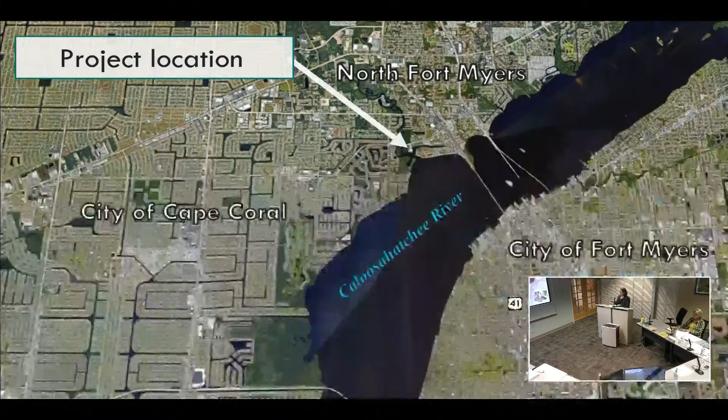This subject property is located north of the Caloosahatchee River in North Fort Myers. It is located immediately south of Hancock Bridge Parkway and west of North Cleveland Ave. It is currently zoned CPD and is permitted a marina with up to 352 dry boat storage slips, 24 wet slips, 5,864 square feet of office uses, and a max height of 50 feet.

The property is in an urbanized portion of the county, as noted on the surrounding land uses map. There are a number of multifamily residences in proximity to this site, with an estimated total of 750 condo units along the corridor on Hancock Bridge Parkway. There's also an assisted living facility and a number of commercial uses, including the Nauti Parrot restaurant.

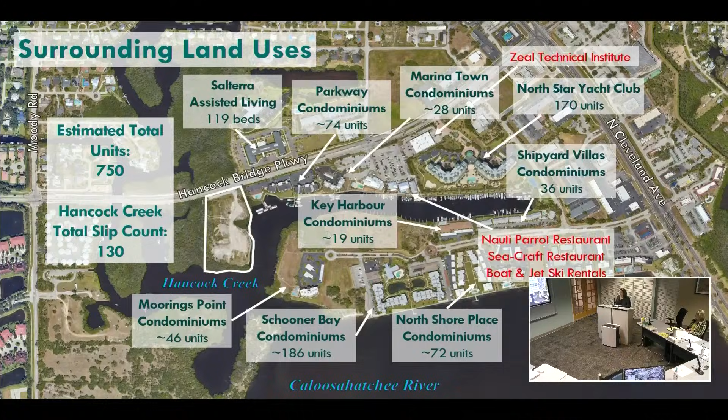Seacraft restaurant, and there are also boat and jet ski rentals. There are a number of boat slips along Hancock Creek as well, with a total slip count of approximately 130 wet slips. The CPD amendment being requested would allow for a reduction in the dry slips from 352 to 160 dry slips, and an increase in the wet slips from 24 to 50 wet slips.

We're also requesting clarification of the approved uses, which would consist of 4,500 square feet of boat sales/office, 1,500 square feet of restaurant uses, 800 square feet of retail, and 980 square feet of a food truck area with no more than 3 trucks proposed. The maximum building height being proposed is 135 feet.

The property is located along what we consider a water-dependent area. It is noted on Lee Plan Map 1H as number 29. This outlines water-dependent uses and shows us where water-dependent uses would be appropriate. In this case, a marina would be an appropriate use for anything in the water-dependent overlay.

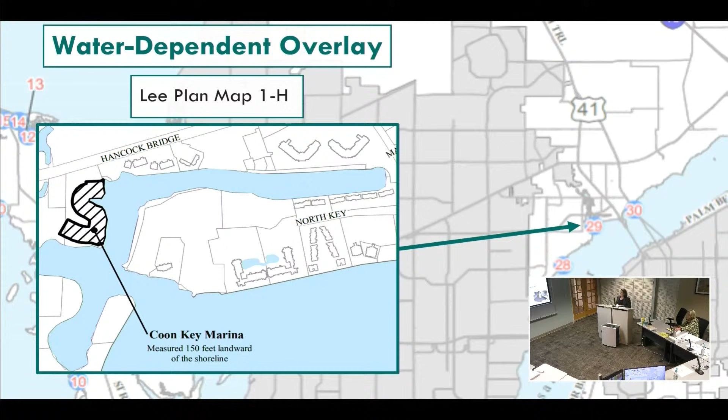So there's no bus route on Hancock? There is no bus route on Hancock Bridge Parkway. Okay, thank you. Can I clarify something? Sure, Brian Smith for the record. There is an express route on Hancock during the trolley. About 220 feet to the east of our site is an existing trolley sign on our side of the road, as well as on the opposite side by Salterra, the assisted living facility. So it's part of that express route during trolley season. During what season? The downtown Fort Myers trolley season. So it's running right now? It should be, yes. And where does it run, between what and what? It basically runs that same route, but on Hancock Bridge Parkway. Okay, thank you. Yes, ma'am.

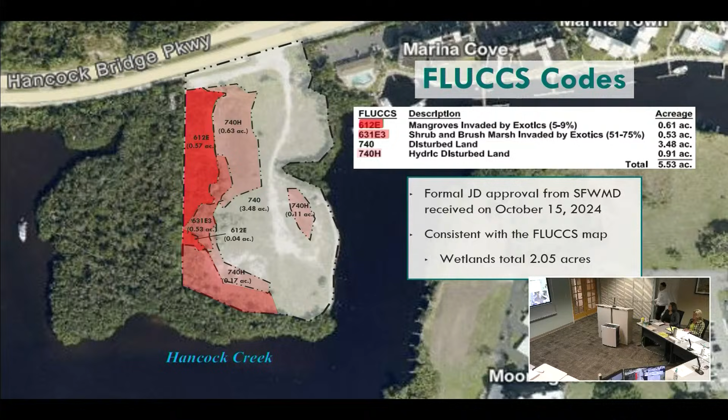Good afternoon, for the record, Yury Bykau with TR Transportation Consultants. I have been sworn in and previously accepted as an expert in transportation planning, and would like to be accepted as one today as well. Yes, please proceed. Thank you.

What do you attribute the reduction in trip generation to? This is mainly due to a significant reduction in the number of dry slips specifically, about 192 dry slips, so that's where it comes from. So the project as proposed is overall a reduction in intensity over the existing approvals? Yes, correct. Thank you.

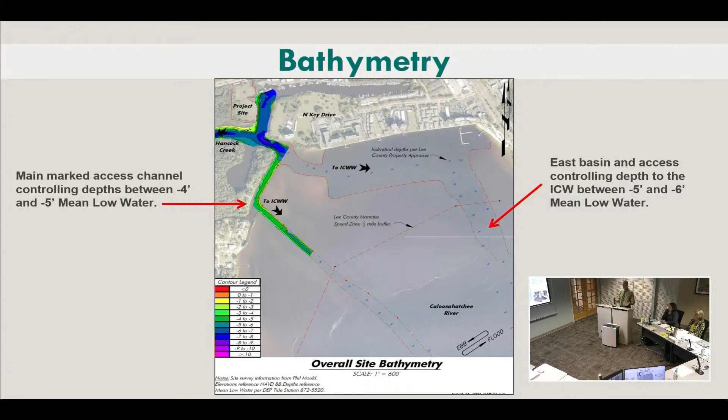North Fort Myers is underserved in terms of boating access. The most recent marina facility in closest proximity was the Prosperity Point Marina on the north side of the river. As you go over the Edison Bridge headed north, you can see what happened to it with Hurricane Ian - it's a mess. That was really the only serious commercial marina other than Paradise Isle Marina, further down the shoreline in Cape Coral. There's just not that much boating access for commercial or public use of the waterway.

This is a close-up of the location. Again, we are buffered by a conservation area here, so there's no residences in this location or in this location that would be affected by a dry storage operation.

We are on Deepwater Canal access. The Hancock Creek flows down through here and through this area and out, so it's got good water quality, good tidal exchange. Those are some of the things we have to meet with the state in terms of water quality. Again, it's a reduction in the total number of slips from 352 to 160 dry.

We're increasing our wet slip storage. Part of this is staging for the dry storage operation. Keep in mind that of the 160 slips in dry storage, on the best day of the year, say 4th of July, we may launch maybe 16 slips out of dry storage. But those slips need space to tie up as staging to go in and out of the dry storage. So while we've got 50 wet slips proposed, a certain amount of those would be dedicated for staging for the dry storage operation. So it's not 50 wet slips dedicated in the water - that's important in terms of the total slip count for the site.

I've already talked about the other items in here. Again, take a look at these destinations with the Nauti Parrot Tiki Hut restaurant, all the different activities that take place up this canal, including personal watercraft rentals. This is really in the center of quite a boating community, and it's a super appropriate use for this location - servicing not just the vessels that exist in this area, but providing access for upland residents that don't live on the water but want to partake of our waterway resources in the county.

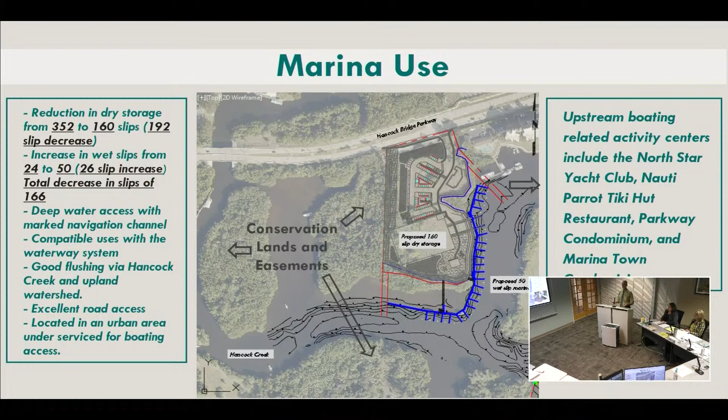This is where we stand with the Manatee Protection Plan. It's an area of special concern in the river. Our shoreline is based on the amount of linear footage of shoreline that we have, and that allows us to have the 50 slip maximum.

In order for us to facilitate the 160 dry storage slips, we're going to have to find a donor property and transfer slip credits from those donor properties. We have a number of donor properties available. One of them we're in a contract with, but that's been put off to the side as they resolve some ownership issues. So we do have sources for transferring slip credits.

I don't know if you're familiar with that system - I'm happy to advise you on what that is if you're interested. I am familiar with that. I worked with that when I was at the county attorney's office.

So you need 160 slips from another location, for the dry boat storage specifically. In the interim, if they do not secure the upland site, if there's no way for them to transfer boats from the land into the water via travel lift or gantry assist or anything like that, they could still operate and have like a boat dealership operation on that site where they could have boats. If they just can't launch them into the water, then they really would not count as a boat source. Again, the whole premise behind the Manatee Protection Plan is where the boats are originating from and what threat they pose to manatees in the river.

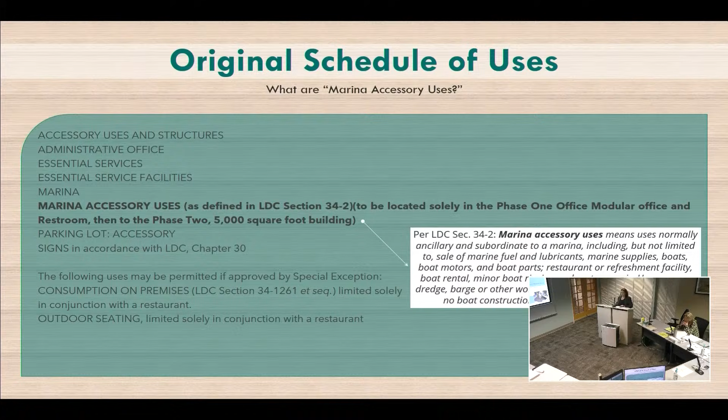Before you start, I read the 48-hour notices, and my understanding is the 48-hour notice from staff represents codification of all the changes proposed in the applicant's 48-hour letter. Is that correct? Yes. So I can work off that document in preparing the recommendation? Absolutely. Okay, all the uses that need to be in are in, all the uses that are not are out. Correct. Okay, thank you, Cindy.

I just wanted to outline briefly the original schedule of uses for this site. It references something very interesting, which is marina accessory uses as defined by LDC section 34-2, which is the definition section of our zoning chapter of the LDC.

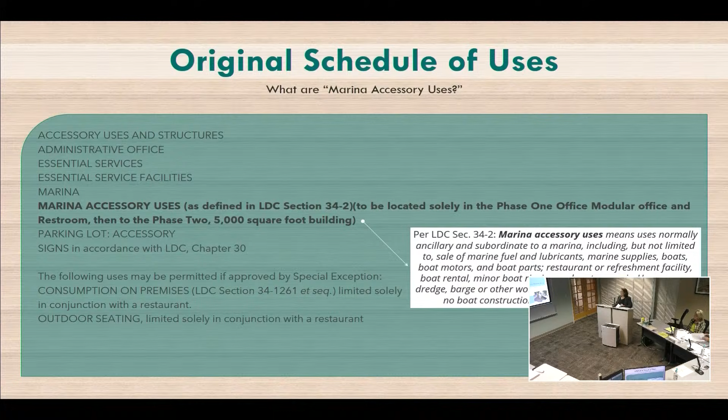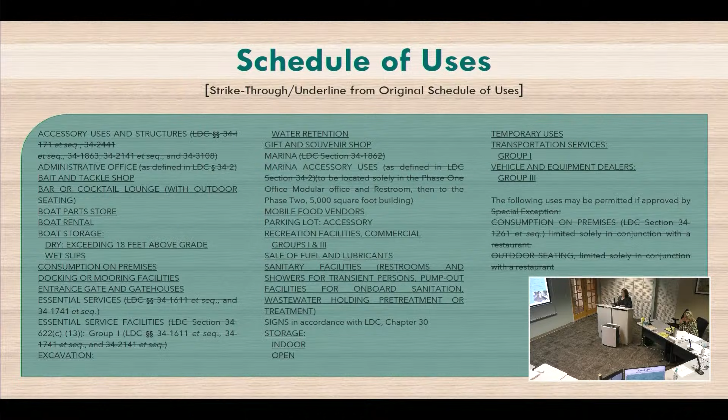The reason we are modifying the schedule of uses to look like this is we've actually broken down what those uses are, the marina accessory uses. The problem with initially tying an LDC section and generalizing marina accessory uses is that at some point in time, that section of the LDC can be amended without notification to any property owners, because there's no way of tracking how many zoning resolutions have marina accessory uses listed. So by breaking them out this way, which is traditionally what's done in more recent cases, we're able to clearly state what we're proposing. So it still includes marina accessory uses, but the specific accessory uses that you hope to operate on the site have been broken out and added separately. Yes. Thank you.

That was all I wanted to add on that section. I'm gonna ask that Brian come back up and discuss the master concept plan.

Good afternoon again, Brian Smith for the record.

So you're going to see some consistency between both our master concept plan and their master concept plan when we went through this process. With our master concept plan, as Hans eloquently stated, we are in a Mecca boating community. This is where we are, this is where we live, and a lot of people move here for that reason.

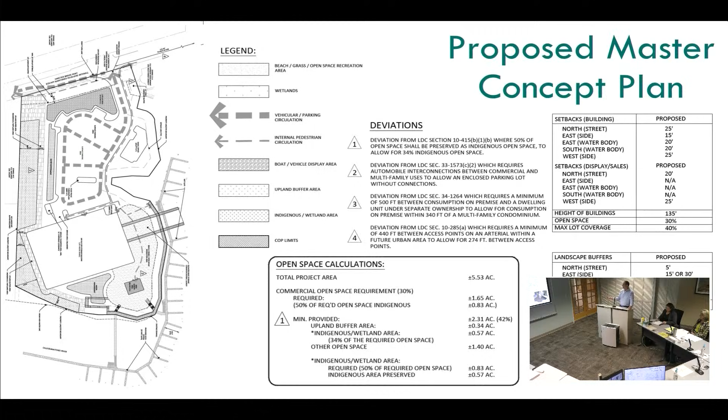We went through the master concept plan on the last sheet. This one color-codes it a bit for ease of reading. Again, as we stated, the sales office is located on the eastern side of the property, consistent with the previously approved master concept plan. The parking facilities are north of our dry slip building, again consistent with the existing commercial plan and master concept plan.

We're also showing the location of the beach grass open space area that is open to the public, as well as a restaurant canopy bar area available for patrons coming by vehicle or by boat. We have our stormwater management areas as well as our preservation areas around the site, also color-coded. The light green is indigenous wetland area that we are preserving - an area of high quality, good mangroves that the previous CPD did not preserve along that western side. We are preserving quite a large amount.

Again, to quickly go over it, the east landscape buffer is 25 feet, right adjacent to the Parkway condominiums - 5 trees and 30 shrubs per 100 linear feet. The shrubs are supposed to grow to mature height, not trimmed up, and it's an 8-foot wall. It's a type E buffer, yes ma'am, with an 8-foot wall.

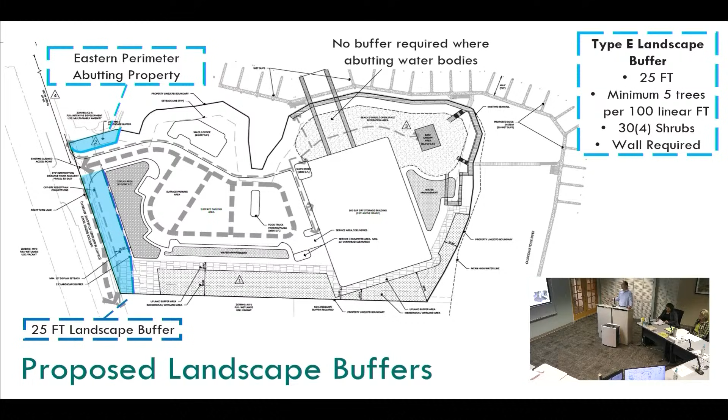Again, anytime you have vehicle sales display, it triggers another code in chapter 34 that requires a setback for that display area as well as a 25-foot landscape buffer. It's not considered a type D or E buffer, but it has its own specific rules and requirements - a 2-foot undulating berm, 5 trees, and a double hedgerow like you'd typically find for a type D buffer. But the trees are also upsized - instead of a typical 10-foot tall tree, they're required to be planted at 14 feet in height, giving more of a screening effect for the boat display area.

Deviation 1 was to allow a reduction in indigenous requirements, because in the LDC, when you have open space requirements - say a 30% open space requirement - 50% of that has to be indigenous if indigenous vegetation occurs on the project site. To make this a viable project, we preserved an area along the western side, but we weren't able to meet the 50% indigenous open space requirement, when the previous CPD preserved nothing and only had 10% open space. We have over 30%, and I believe our master concept plan shows we're preserving 42% open space on the property. So deviation 1 would allow us to reduce the 50% indigenous open space requirement down to 34%, but we are above and beyond our required open space in general on the site.

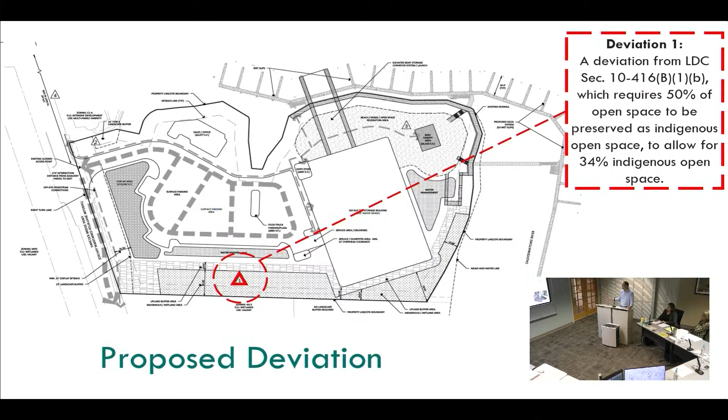Again, went through this deviation from that section requiring 50% open space to be preserved. Out of the project, as you can see on an aerial, the majority has been disturbed. When you visit the site, it has been disturbed - it was used as post-Ian boat storage and has just been disturbed over time, even since this first CPD was started, because they actually pursued a development order at one point, and I believe that was all withdrawn a long time ago.

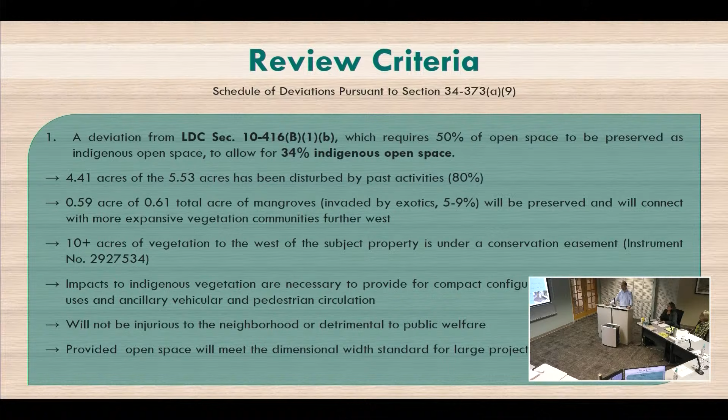Deviation number 2 is vehicle interconnect. We're asking for a deviation from section 33-1573 C2, which requires that when you go through a rezone, you provide parcel interconnects within Lee County. Instead of having a parcel interconnect, we cannot go to the west because it's all conservation area, so their only opportunity would be going to the east.

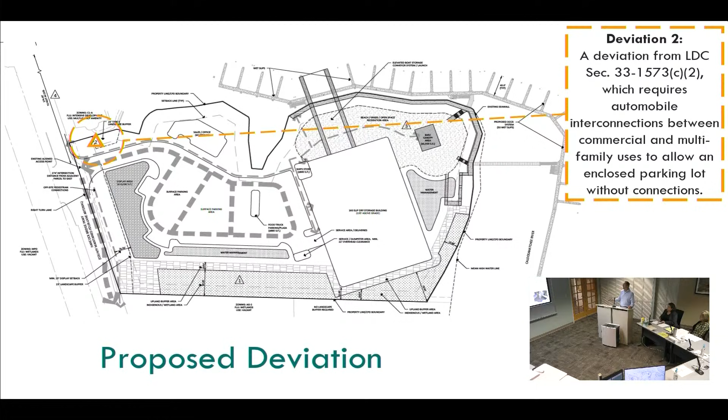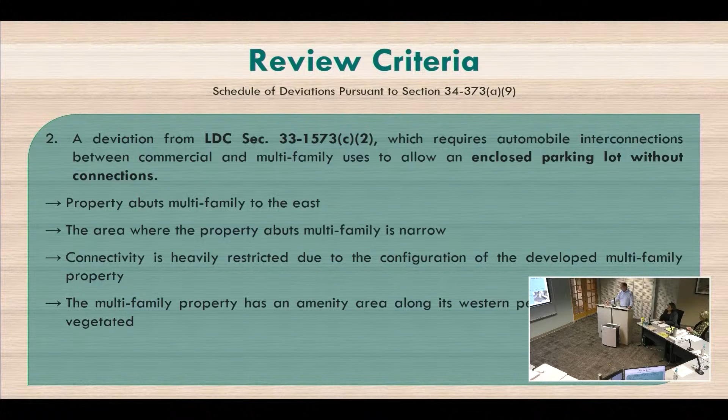That's an existing condominium project called the Parkway Condominiums. Their parking lot ends there, and they have sidewalks. We did not feel it was appropriate for commercial uses to access through their parking lot into Hancock, as we already have a full median cut at Hancock Bridge Parkway. Again, this is deviation section 33-1573, and the reason for it was what I previously stated. And then I'll send it back up.

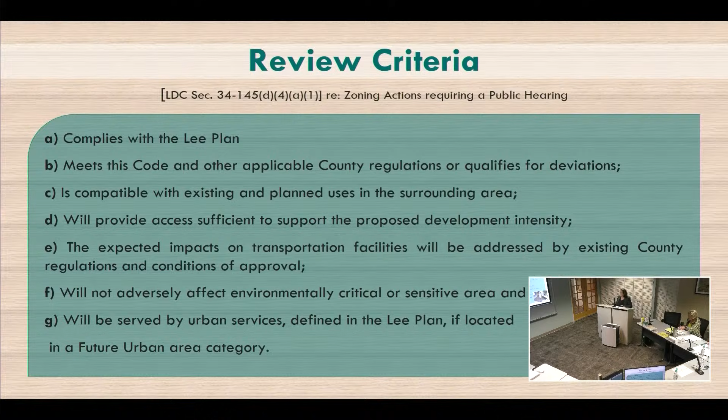Okay, now I'd like to go over the review criteria for any zoning actions. The first one is complying with the Lee Plan, per LDC section 34-145 D4A1. Again, this is for any zoning actions that require a public hearing - they must comply with the Lee Plan.

The first policy we'd like to discuss is policy 1.1.4. The Lee Plan describes the intensive development category as located along major arterial roads and suited to accommodate high densities and intensities. Mixed-use developments of high density residential, commercial, limited light industrial, and office uses are encouraged to be developed. The proposed uses and intensities are consistent with the underlying intensive development future land use category.

Additionally, pertaining to objectives 2.1 and 2.2, for development location and development timing, which require developments to promote contiguous and compact growth patterns to contain urban sprawl, minimize cost of services, and direct new growth to urban areas that can adequately be serviced by public facilities - the proposed planned development amendment is located on a currently unimproved parcel surrounded by wetlands, open water, and commercially developed properties, and bordered on the north side by a major arterial roadway. The location supports a compact and contiguous growth pattern where public facilities are readily available.

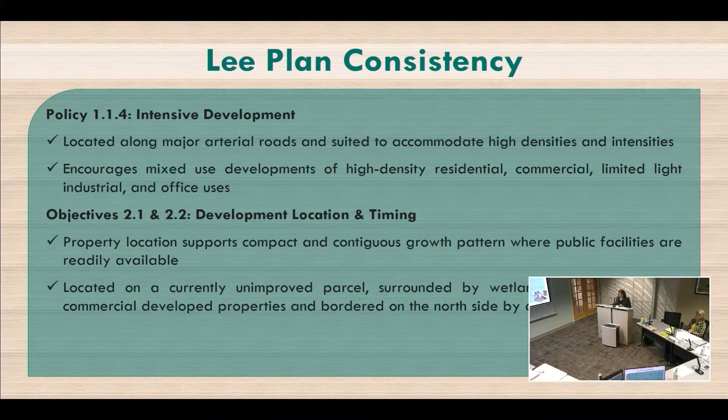Goal 4 provides general development standards, further broken down into objectives 4.1 pertaining to water, sewer, reuse, and environmental standards. While the proposed amendment does not contemplate an excess of 30,000 square feet of commercial intensity, the property is within the LCU service area. Therefore, it will be serviced by Lee County Utilities for water, consistent with Standard 4.1.1. Similarly, the project is within the LCU service area for sewer service, and therefore the project will connect to adjacent sanitary sewer lines, consistent with Standard 4.1.2.

Additionally, consistent with Standard 4.1.4, the subject property was assessed by an ecologist, and their findings were provided in the companion environmental assessment and protected species survey. The report addressed existing conditions as well as the mitigation efforts to be realized through the permitting process. The proposed uses and companion site plan fully incorporate the surrounding environment to the maximum extent possible, acknowledging the site's natural environment is one of the key attractors contributing to commercial tourism.

I would also like to note that the adjacent property to our west is a conservation area that covers over 10 acres, so we are providing ample buffering along that western portion of the site to supplement their conservation.

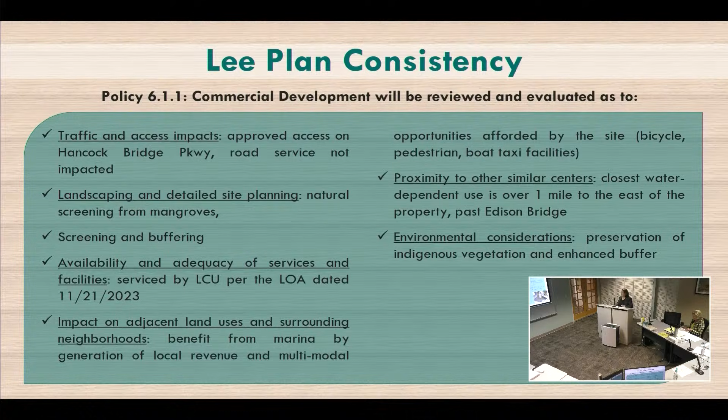Policy 6.1.4 promotes commercial tourism in the North Fort Myers community. 6.1.5 protects the traffic carrying capacity of roads and streets from incompatible commercial development. The proposed amendment's companion traffic study supports the assessment that the uses will not trigger a level of service deficiency for the adjacent road network. Alternatively, the proposed reconfiguration of uses and intensities results in a reduction in the maximum trip generation of the project.

Policy 6.1.6 requires commercial developments to provide adequate and appropriate landscaping, open space, and buffering. The application proposes the retention of indigenous preserve areas to the greatest extent possible, as well as buffers that meet or exceed LDC requirements and are consistent with the commercial corridor overlay, further noted in policy 30.2.6. And we have policy 6.1.8 pertaining to the protection of schools. The property is not located near an existing or planned school.

The request also supports Goal 8, which is marine-oriented land uses. As previously mentioned, the subject property is located as number 29 on Lee Plan Map 1H, further protecting the site and adjacent preserve areas from incompatible land uses. The proposed request is also consistent with Goal 30 of the Lee Plan.

Can you show that to me on a map so I can visualize it? Let me see if I can get you to something that will show you that. Yeah, this will work. So basically this is the artificial canal. This actually was originally partially a natural water body that was further dredged. Hancock Creek is a natural water body. There is a vertical seawall that runs along the property along the whole eastern side, and down to about right here it stops, and then we have a large mangrove fringe that exists in front of that wall, defining that location on the landward side. So we've got a seawall boundary that clearly delineates the upland from the wet areas, whether it's the canal part or the mangrove part.

The dock access at this location actually was historically a dock. And so in order to get access to the floating docks out here, it made sense to punch through the mangroves where we already have an existing opening, where there was already a fixed commercial dock that went through that location. So we've minimized our mangrove impacts. The floating docks out here are all located in front of the vertical seawall, so we don't have any mangrove impacts with that particular location as well.

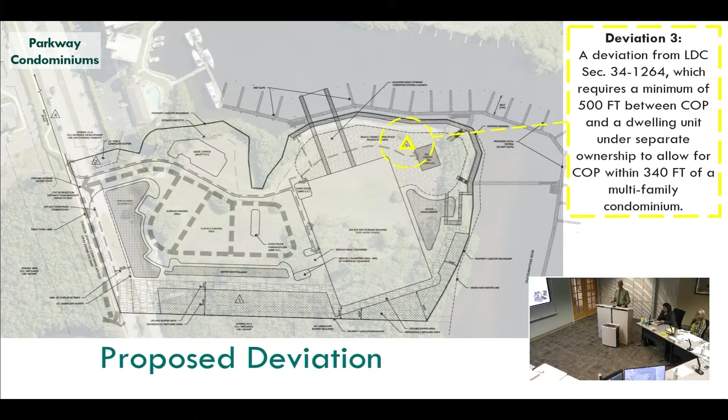And then on the west side of the property down here, this is all conservation lands, mangrove wetlands. Part of this conservation land was dedicated by the developer for Mangrove Bay, the multifamily condominium on the west side of Hancock Creek. Part of this is transitional area, not that healthy mangrove system—it's more of a transitional buttonwood, moderate upland wetland area. So we're preserving those, and centering all of the development in the appropriate areas on the property for that particular development. Let me see if I can get us back to this.

Again, as I said before, the docks are proposed to the opening of the mangroves. We're going more and more with floating dock systems for a couple of reasons. We've taken away some significant lessons from Hurricane Ian, and that is floating docks are much more adaptable, particularly the infrastructure, including the electric, fire suppression, and water supply, in terms of storm surges. Fixed docks were inundated, with a lot of costs associated with the infrastructure—power pedestals, electricity. Floating docks are much more adaptable to those types of storm surges and changes in those events.

While it talks about protection of human life and property from natural and man-made disasters, it's very difficult to have a waterfront facility, a marina, that's not on the water. As a result, we do have some wave energy that comes through, but we're tucked in the back part of the property. We don't have a very large exposure to the Caloosahatchee River.

So we've got this mangrove fringe on the south side with a retaining wall behind it to help attenuate wave energy. We've got a seawall on the east side of the property, and we have floating docks. The property is designed to deal with, per FEMA, elevations required for those activities in those locations. So it's basically prepared to deal with natural and man-made disasters.

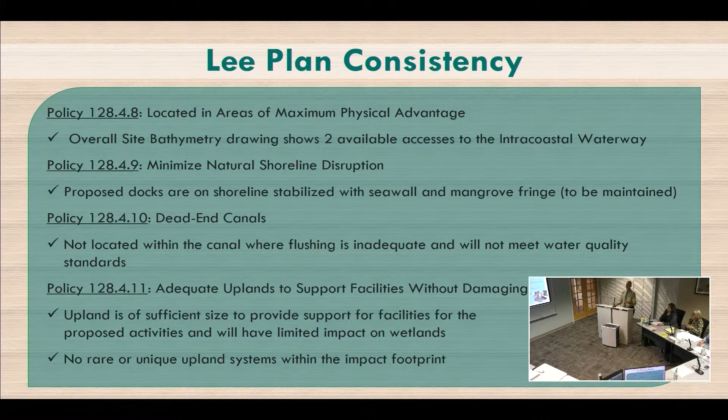They also have exotic vegetation in them as well. Under boat maintenance activities, you've got a stormwater management plan, you've got a marina management plan. Because it's a commercial marina, we'll be required to secure a National Pollutant Discharge and Elimination System permit, which is an even more restrictive permitting process that governs how you operate your marina, what kind of pollutants you produce, and requires that you monitor your discharge off site when you have a rain event on a quarterly basis. You actually take samples and send them into a water quality lab to make sure that your pollutants are being captured and treated on site and not going into the adjacent water body. A much more rigorous management program than any condominium would be required to adhere to.

Again, the marina management plan deals with fuel and oil containment. It deals with sewage pump out. Basically things that we're looking at providing convenience for the boaters that are coming to the site and using the vessels. Most trailable boats, most dry storage vessels generally don't have holding tanks, but some of them do for the convenience of some of the guests, and so we'll have places that they can drop off, typically in a fuel space, or usually it's the launch location, there'll be a drop location for those temporary containment vessels, units on the vessels.

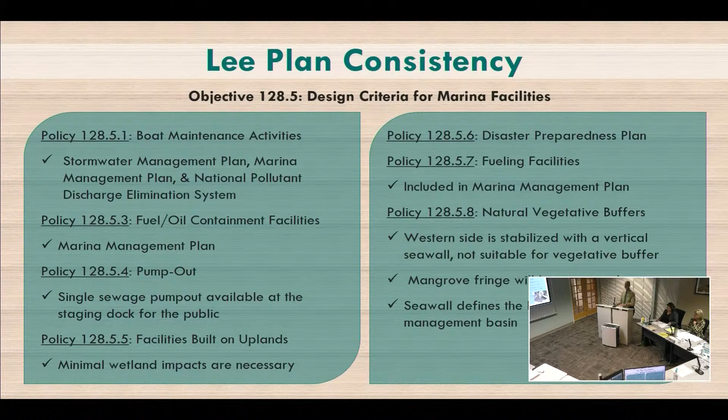We're able to create everything without having any impact to mangroves on the waterward side. We do have some wetland impacts associated with the upland development plan. One of the things that people don't really take into account is that floating docks themselves create habitat in waterways, because you have all these sessile organisms like barnacles, oysters, tunicates. They all attach to the bottoms of those floating docks as filter feeders. So they're constantly bringing in suspended organics as a source of food. We actually kind of create our own little artificial reef with these floating dock systems. That's one other reason why I tend to lean towards floating docks in our waterways if it's not in a really super exposed location.

Again, design to minimize impacts while retaining needed space for facilities. Policy 128 talks about dry storage being encouraged.

Certainly it is, because it does a number of things. It consolidates the location of the vessels, keeps them undercover in most cases, and it's basically a better management tool by consolidating boating activity and preventing sprawl. Where wet slips are basically one slip per square footage, with dry storage I can have 3, sometimes 4 vessels in that same square footage. So it's a more efficient storage mechanism for vessels.

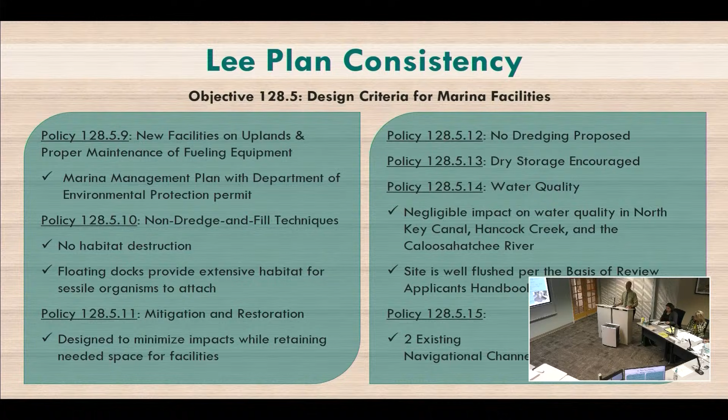And then again, policy 128.515 talks about existing navigation channels. We have those marked. That's important. And with that, I'll turn it over to Cindy unless you have any questions for me. Thank you very much.

Cindy Lead Brizuela, for the record. I did want to go over goal 30 of the North Fort Myers community, which covers the North Fort Myers community plan in our Lee plan. It's important to note that when this project was originally approved in 2008, the North Fort Myers community plan was roughly a paragraph long in our Lee plan. It has now developed to a much more comprehensive component which guides development in this area, in this community.

And so over the last few years, a lot of that has been codified within LDC section 33, chapter 33, which covers the certain planning communities, North Fort Myers being one of them.

So starting with policy 30.2.5, which outlines supplemental development criteria for properties within the corridor overlay district, which we are in, consistent with LDC section 33-1566D. The property's frontage along Hancock Bridge Parkway makes the corridor overlay district regulations applicable to the subject property. Furthermore, policy 30.2.6 allows for developments within that district to utilize the development standards outlined for mixed-use overlays. The subject property is consistent with both policies as further noted in the companion master concept plan.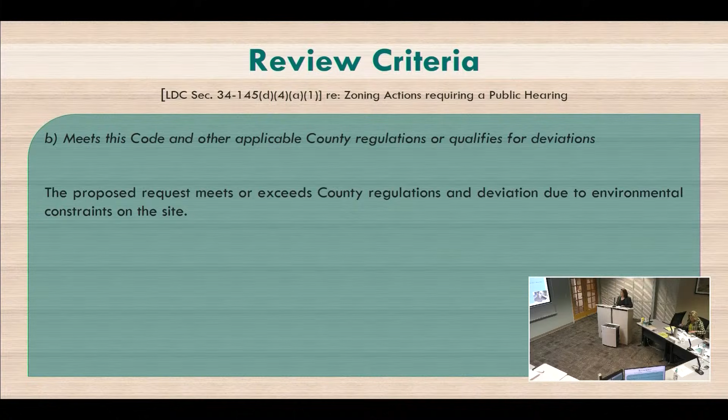Jumping into the review criteria once more, as we recall, Part A of the review criteria for zoning actions requiring a public hearing is consistency with the Lee plan, which we've just reviewed. Part B is that it meets this code and other applicable county regulations or qualifies for deviations. The proposed request meets or exceeds county regulations, and the deviations were requested due to the environmental constraints and the configuration of the site.

C, that it is compatible with existing and planned uses in the surrounding area. As discussed, the proposed use is highly compatible with existing and planned uses in the surrounding area. The development of the parcel as a marina is also consistent with the property's water dependency status per Lee Plan Map 1H.

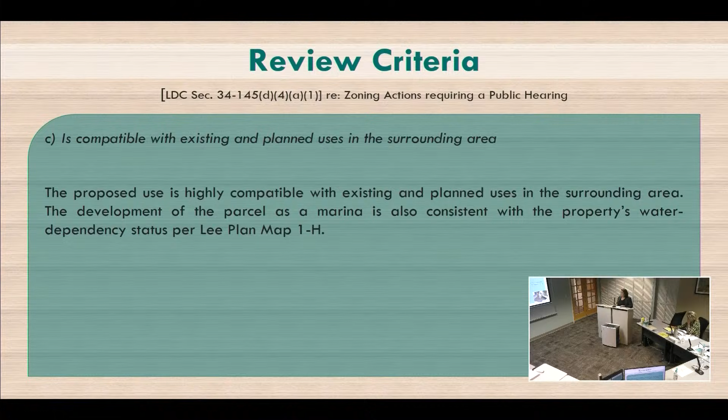D, that we will provide access sufficient to support the proposed development intensity. As we noted in the companion traffic study, the adjacent Hancock Bridge Parkway has sufficient traffic carrying capacity to accommodate the development of this marina, as well as the accessory uses at the proposed intensity.

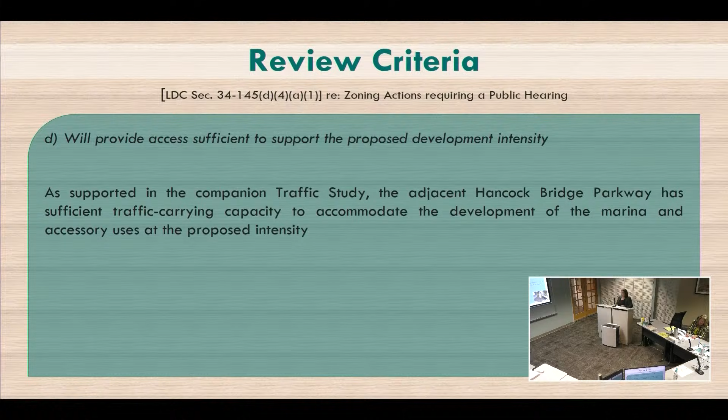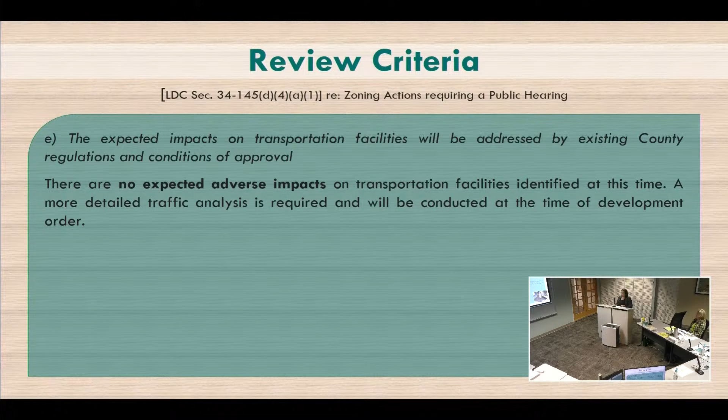E, that the expected impacts on transportation facilities will be addressed by existing county regulations and conditions of approval. There are no expected adverse impacts on transportation facilities identified at this time. As mentioned, a more detailed traffic analysis will be required and conducted at the time of development order, once uses are specified and an intensity is essentially designed.

F, will not adversely affect environmentally critical or sensitive areas and natural resources. As we reviewed through the companion master concept plan, it preserves native vegetation to the greatest extent possible, protecting natural viewsheds and resources from incompatible uses.

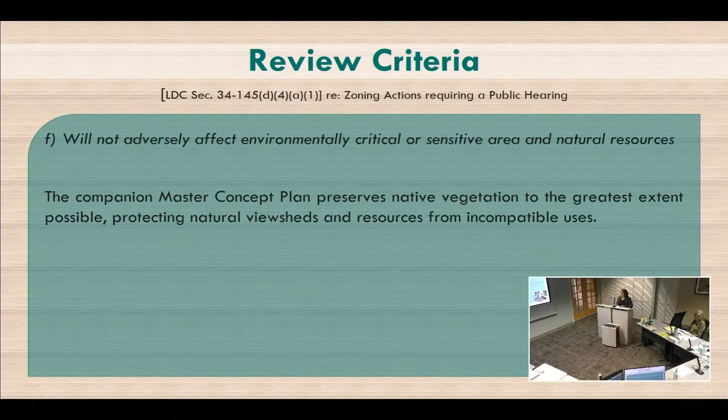G, will be served by urban services as defined in the Lee Plan if located in a future urban area category, which we are, as we're in the intensive development future land use category. The site will be serviced by Lee County Utilities for water and wastewater uses. We have a letter of availability from LCU, and we have potable water and sanitary sewer lines adjacent to the property. LCU referenced in the letter that they have sufficient capacity for potable water and sanitary sewer service.

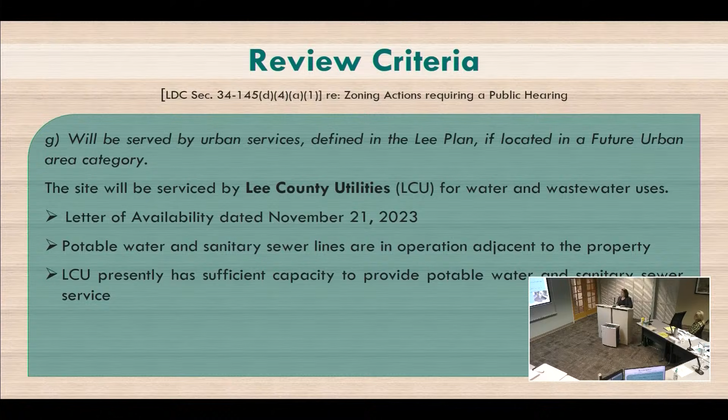Additionally, planned development rezonings have additional criteria for review. The first of which is that the proposed use or mix of uses is appropriate at the proposed location.

As we reviewed, the site is highly compatible with the surrounding land uses, which do feature a mix of residential and commercial uses and are all very much so marine oriented.

B, the recommended conditions provide sufficient safeguards to the public interest and are reasonably related to the impacts on the public's interest expected from the proposed development. As we've discussed, staff has conditioned this project, and we are in agreement with staff's conditions pertaining to all of the development criteria, as well as hours of operation for the marina and everything else.

C, if the application includes deviations pursuant to section 34-373, that each requested deviation enhances the achievement of the objectives of the planned development, and protects the public health, safety, and welfare. As we had discussed previously, all of the deviations requested have been requested because they enhance the objectives of the planned development and ultimately do protect public health, safety, and welfare.

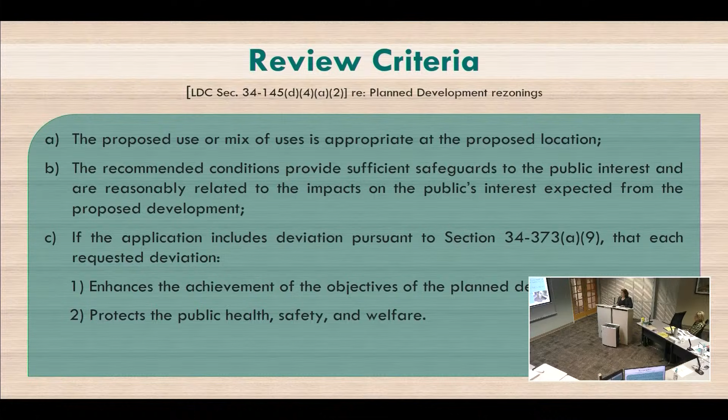Sorry, apparently I winged it and had the notes on the next slide.

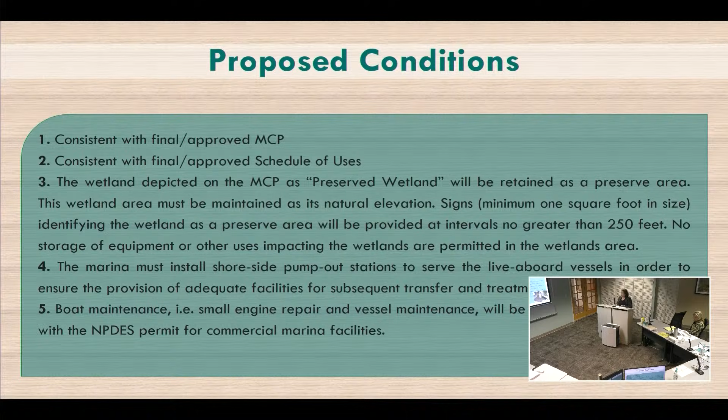Everything regarding boat maintenance and small engine repair or anything like that would need to be consistent with an NPDES permit for commercial marina facilities.

So in conclusion, the conversion of properties with public water access to private development with no boating access increases demand on other boating facilities. We're in an ideal location for a public marina use based on existing deep water marked channels. We have excellent upland road access, especially with having that median cut just on the other side of Hancock Bridge Parkway. And we have, of course, proximity to major population centers, including downtown Fort Myers, this corridor of Fort Myers, which is very much developed, and Eastern Cape Coral. We help ameliorate local demand for boating access that is highly reliant on opportunities along the Caloosahatchee River.

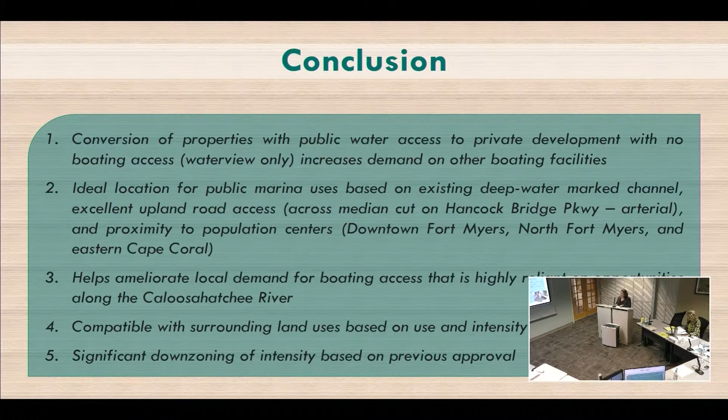And then we also are compatible with our surrounding land uses based on our proposed use and intensity. And this is, of course, a significant downzoning of the intensity based off the previous approval.

I have a question. I didn't see that you requested liveaboards as part of your permitted uses. Is that something that would require further development approval if they were going to have liveaboard vessels in the wet slips?

Do you want to take that, Hans? Because I believe that's going to have to be requested if you want it. Okay, I believe there's a condition regarding the liveaboards, but I'll let Hans speak to that.

Practically speaking, liveaboards are not a great revenue generator for marina facilities unless it's a very large marina with accommodations for those. Between boaters coming to the site for the Cabana Cove theme, boaters originating from the site as staging, and whoever may actually put boats in there as part of interest in purchasing a new boat, because they're on the boat sales display location, but when someone buys a boat, they also need to be able to test it. So I don't think we're going to find liveaboards to be a compatible use on that site, just from the standpoint of the practical application and the activities.

Understood, but it sounds like if you want liveaboards, you need to ask for liveaboards, because right now liveaboards is not contemplated as a use - it's not on the list of permitted uses. I would say no, but I'll defer to the attorney and her conversations with the ownership.

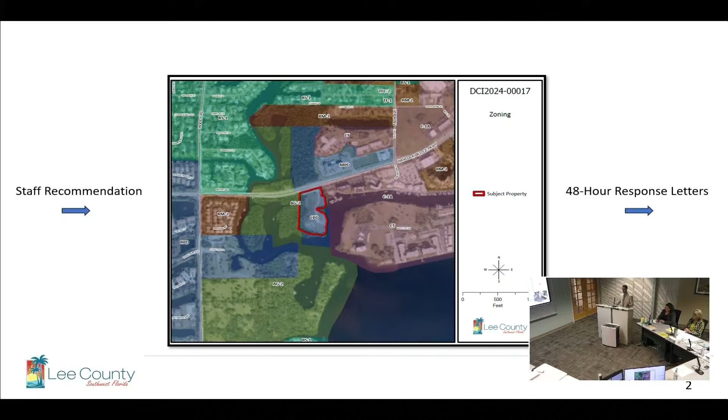And so I'd like to focus my presentation on the salient points, the nexus of the staff report with respect to things like compatibility, and then the 48-hour response letter that were issued after the staff report, just to clarify those. At that time, I'll also clarify some of the comments made here before you regarding liveaboards and some of the accessory uses anticipated to be part of this project moving forward. As part of the staff report, right at the first page, you'll see a summary of net changes from the original zoning resolution, and I have it boxed off in 2 categories here.

We've got the category here, which these are significant changes. This is the boat slips, currently approved 376, requested 210. That's a net change of 166, negative compared to what was approved. And then we have a significant increase in height from 50 feet to 135 feet that's proposed.

And so there's going to be some discussion into how staff came to a recommendation of approval on this notable change. And then you have some of the less notable changes, but really just subordinate intensity, some of these uses that weren't contemplated in the original development scheme, but our staff finds to be compatible with the marina land use in an incidental and subordinate fashion.

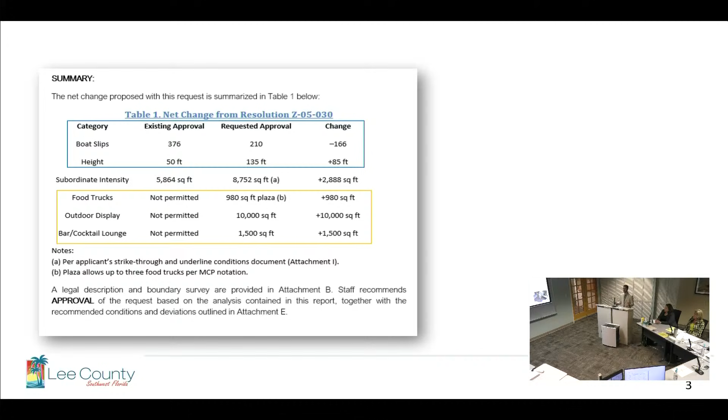So I want to highlight 3 areas of the master concept plan to show you that subordinate intensity. The first area in green is the display area, demarcated as about 10,000 square feet on this 5-acre site. It'll have watercrafts, boats displayed behind a land development code required buffer, which has been described in this record.

Over in the center of the parking area, we have a food truck plaza. It accommodates 3 food trucks. It's a pretty small operation, clearly incidental, clearly accessory to the primary purpose of the site.

And then the last piece described in that new subordinate intensity not really contemplated in the current approval is this bar canopy area, which, as you see by the scale, is 1,500 square feet. That's the limits of the COP, the consumption on premises, for which staff has proposed conditions that take care of any adverse impacts that may come from COP anticipated in this area.

So the COP doesn't include the entire grassy beach area? It does not, no. It is limited to within the confines of that canopy.

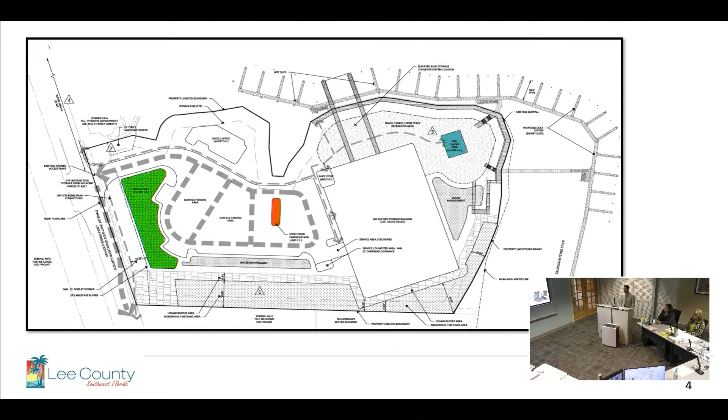So the zoning is commercial plan development currently, and I wanted to walk through some of the prior master concept plans presented here before you today. I just wanted to go back one more step to the 1991 master concept plan, map 1H of the Hancock Bridge Development of Regional Impact, which was approved in 1991 with a companion commercial plan development rezoning as part of the board's adoption of the current CPD zoning on the property.

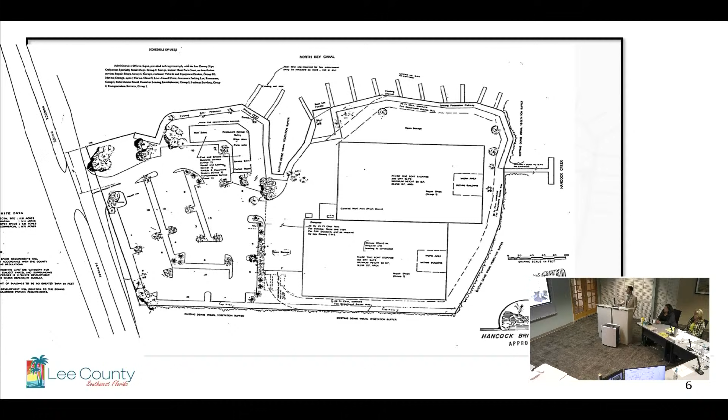You can see at that time there appeared to be 2 phases of buildings that would house up to 400 slips, 200 slips annotated on this map 1H. They were going to be developed at 50 feet tall. The footprint's much larger than what's currently proposed, actually more consistent with the size of one of these buildings now. You can see the sales office and all the accessory uses were listed on this L-shaped office building, located near the Parkway condominiums, with parking in a generally consistent circulation.

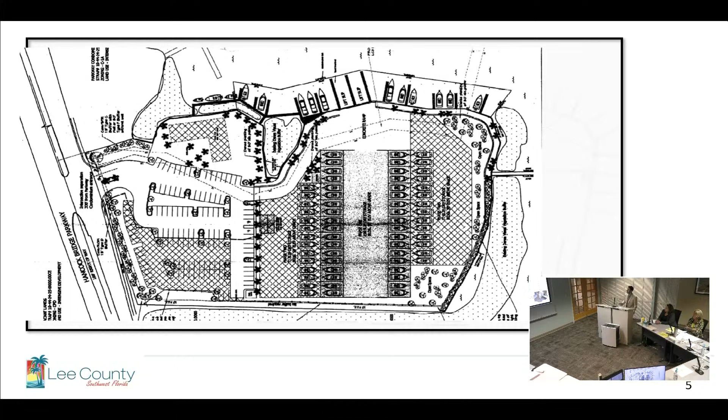Fast forward to 2005, where the last extension request on this development of regional impact was made, and some changes were made. The master concept plan was revised to show a larger footprint of building area. Testimony here was that there was going to be more forklift operation anticipated, so there was more area here for that particular type of dry boat storage operation. The parking stays on the north side of the property, and the building maintained its position here.

So what we're currently proposing right now is the boat barn is going to be in a substantially similar location. It's going to reach a maximum height of 135 feet, albeit the staff report does acknowledge that that height is probably more of a cushion for design, and probably won't actually be realized. But needless to say, staff evaluated the surrounding area for compatibility with a proposed 135-foot boat barn to see what that looks like in the context and fabric of the surrounding area.

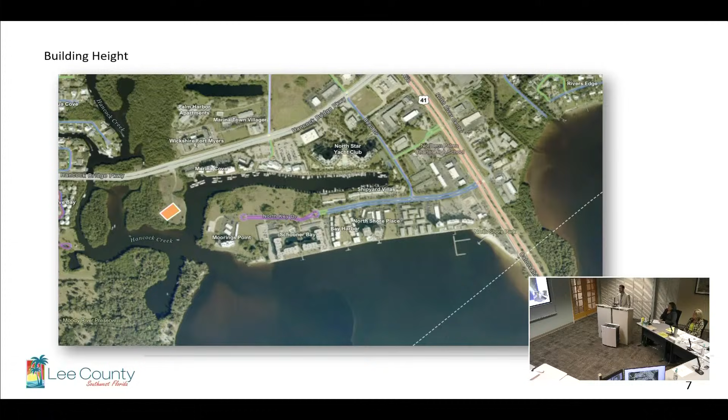And so I'm going to walk you through some of these areas adjacent to the North Key Canal and walk you through why staff found that 135 feet is appropriate, not just based on what's existing, but based on what can exist under current zoning and planning entitlements without rezoning.

And so the first building of note is going to be the North Star Yacht Club, which isn't very far from the subject property. The property appraiser's office has listed this as a luxury high-rise, max stories. It's got 13 building stories indicated. The development order plans attached to the staff report indicate that this is 135 feet tall. There's the max height in Lee County right there.

In Lee County's future land use category of intensive development, in close proximity to the subject property, as we work our way west there's a step down once we get past the commercial Naughty Parrot, some of that building and offices between North Star Yacht Club and Marina Town condominium, where you have a mid-rise, defined as 4 to 7 stories.

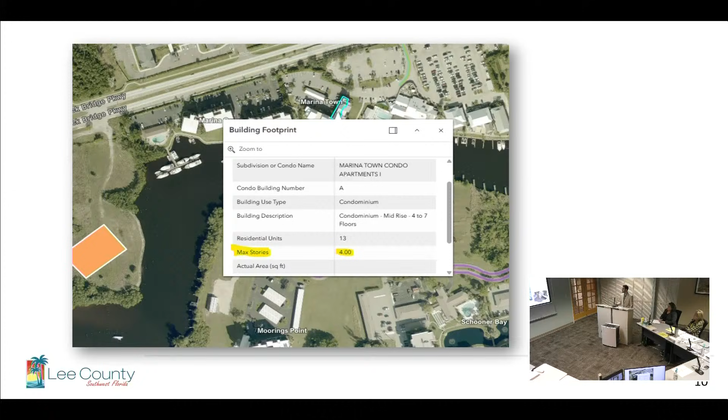It's a 4-story building in that location, where there's a step up at what's listed here as Marina Cove, but that's actually not the current name of the Parkway condominium. So this is the Parkway condominiums. It's also listed as a mid-rise between 4 and 7 stories, listed as 6 stories here.

So we'll work our way across North Key Drive and reach one of our closest condominium towers on North Key, and that's going to be Moorings Point, which is 8 stories and considered a high-rise. Here's a pictometry aerial of North Key Drive in proximity to the subject property. You can clearly see this building right here, listed as 8 stories, estimated to be about 95 feet tall, but I don't have the exact height on that building on any county records.

So you can see in this pictometry oblique angle, this area, this corridor, especially along the river, is highly vertical. The separation between the nearest buildings and where the actual boat barn will be, we as staff find sufficient. It's at least 500 feet from the nearest residential condominium building. That's a fair step down or fair transition before reaching that increased height that staff finds appropriate.

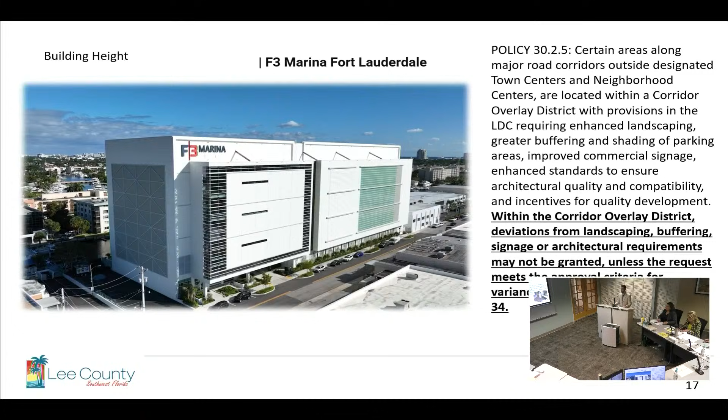And so, while the staff report conditions provide adequate protections to mitigate offsite or adverse impacts, I want to mention some of those conditions. Schedule of uses and development regulations have been refined to really point out that the primary use of the site is still a marina. There is some subordinate intensity that is appropriate with this principal use of a marina.

That's not going away within the water dependent overlay. We have open space and indigenous preservation conditions, as well as marina management conditions dealing with water quality management, mangrove conditions, North Fort Myers design standards, and also marina operations and open storage limitations, which carry over from prior zoning approvals, where some operations like forklifts were concerns to the nearby Parkway condo and Moorings Point condo, the closest towers in proximity. So some of these things have been flushed out in public hearings regarding the use of this site as a marina with a dry storage boat barn and the proximity to these residential towers. There's also the addition of COP specific conditions that list the actual use it may be in conjunction to.

The actual area is limited to a 1,500 square foot hatched COP area. It's on the master concept plan, hatched within the building. The time limitation we feel is appropriate given its distance.

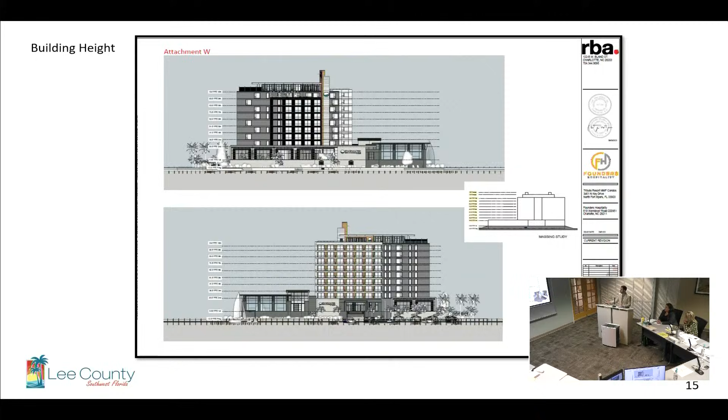I wanted to point out that the distance between the COP area and the nearest residential building is well over 500 feet. The LDC requires you to measure from the COP entrance or exit to the nearest property line, which, as you saw the lay of the land, actually comes down. Let me find a good aerial - their property line comes down right here.

So the distance from that tiki hut, which is right here, was measured. That 500-foot deviation is from the distance required in the LDC from about here. The nearest residential condo is just east of the amenity site. So there is a distance greater than 500 feet between the COP demarcated areas proposed and their nearest residential unit.

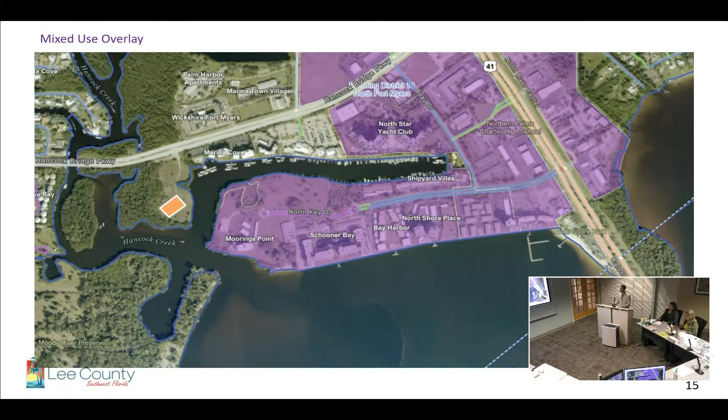It's just the LDC requires that distance to be measured to the nearest property line. Okay, let's go back to the conditions, because I want to discuss one of them - live entertainment, amplified sound. I'm interested in hearing your rationale for what I consider to be a very generous time frame for the use of amplified sound.

I have no objection to entertainment, but with amplifiers over water, I'm wondering whether those time limitations are too generous. Understood. So I see two gradients of live entertainment - discussing both live entertainment and amplified sound, piped music, things like that, that may be more at conversational level or just something you'd anticipate at a tiki bar. There'd be live music out of an amplified sound system, but it's not quite at the intensity of live entertainment on a stage with a musician.

So staff could work with the applicant to try to make a distinguishing condition between live entertainment and just piped music, and that could further increase the chances of compatibility with this particular consumption on premises use and bar cocktail lounge use. Okay, well, let's wait to hear from the public, but right now that's a concern of mine. If we could put a finer point on that condition, I would feel more comfortable in terms of a finding of compatibility.

So what is proposed at this particular time is this dry dock storage, and this is a gantry system. It's basically a conveyor belt system, fully automated. Boats go through on a conveyor belt, and it drops it in and picks it up and puts it back into the storage facility. That is currently what is proposed right now, with the ability to have service drop-offs and the ability to have potential forklifts inside as well as underneath.

Any other questions? I don't, are there any questions you believe we failed to address? No, I think you've addressed everything that was raised.

There was a question regarding power washing boats. That's right, yep. Basically, power washing does not occur outside. It's all encapsulated within the dry storage area.

That's how these new systems work. Boat wash, etc. are done inside the building. I'm not saying this is what they're doing, but they literally have swimming pools that they put the boat in, and it works inside the building.

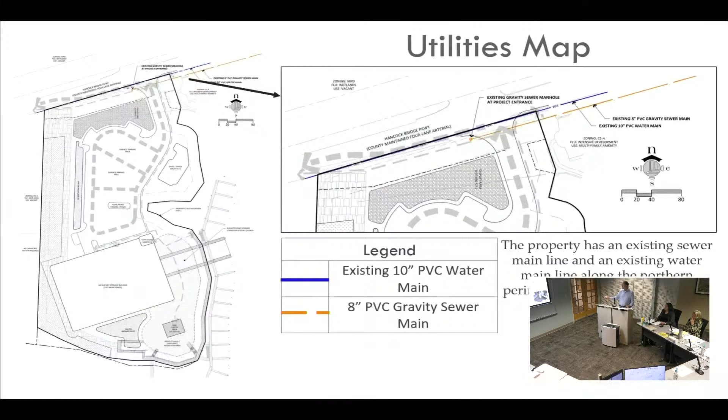Okay, but the consumption of alcohol is going to be limited to that rectangle. Correct, we'll have pathways to it, walkways through it, but in the general sense... So what will that area be used for? This is kind of the Cabana Cove, their beach, outdoor area where kids can play. We can use artificial turf, regular grass, native grasses, or sand, etc.

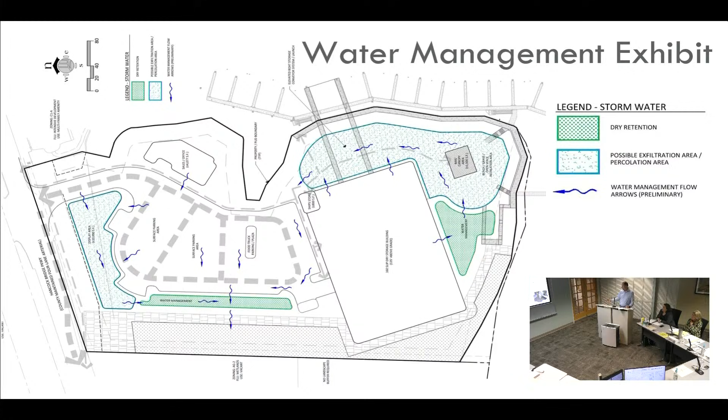And site parking is over here to the left? Yes, ma'am. I want to go to this one that's straight up, the site plan. It's a little bit easier to see.

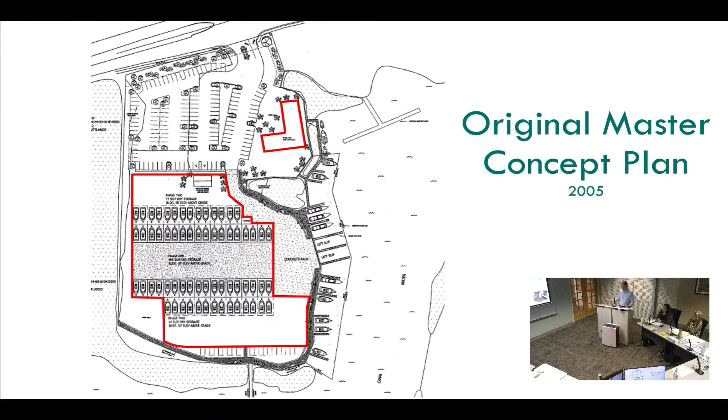Because again, the existing CPD had parking to the north, that office area, and this was their large existing building today, what is approved. What we're proposing is parking to the north, oriented north to your left. Again, parking, a building that's not as large as they had before, and then we have just more open space area around the project.

Thank you. You're welcome.

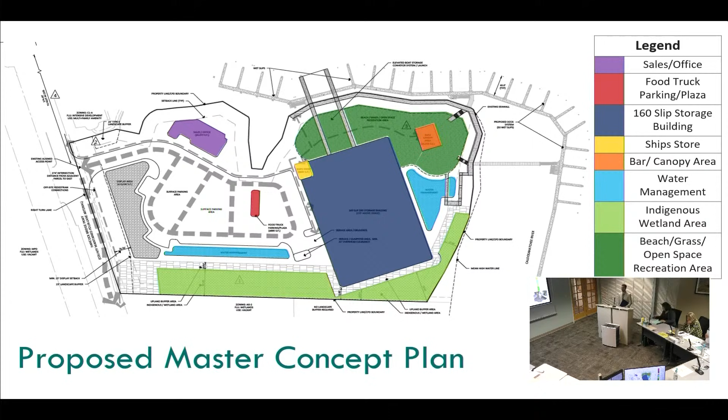I felt well prepared for this case. I will share that I did a site visit in advance of the hearing, but now, after hearing the testimony of members of the public, I will go back again to drive the area to get a better feel of your concerns relative to the site. Thank you. Thank you.